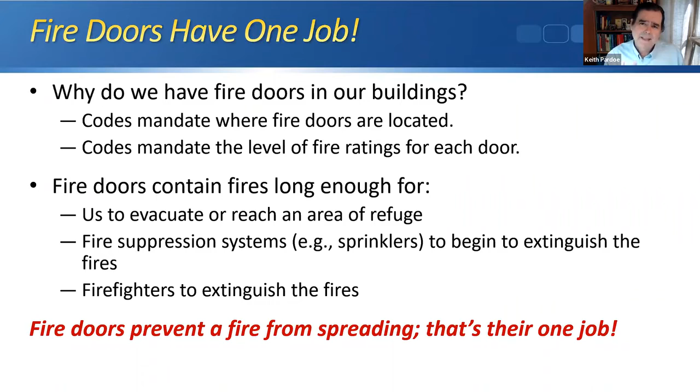The reason those doors are there is to prevent a fire from spreading. That's their one job. They do other things, obviously, right? Swinging doors do a lot of other things. But their one job is to prevent a fire from spreading. They give us time. They give us enough time to reach safety. They give us time for the fire suppression systems to do their work. They give us time. That's why they're not fireproof. They're not going to protect the building forever, but they'll do their job long enough.

Some of you might be familiar with the different levels of fire ratings of our swinging doors. This is a quick list of them.

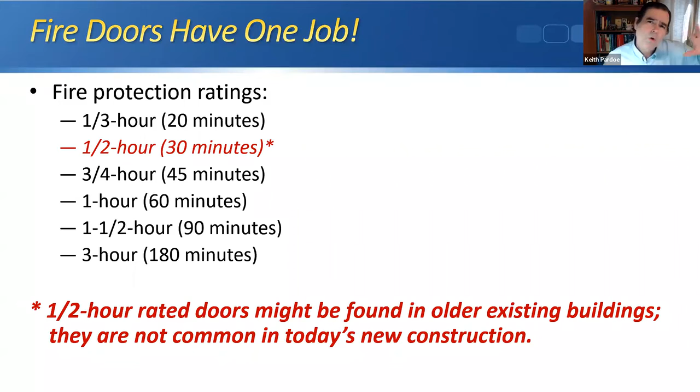The one in red, the half-hour door, was in our codes and standards for a short period of time when you look back at the longevity of our codes. Some older existing buildings, you might find them out there. Today we don't use the half-hour rated door so much, but it's a viable fire-rated door assembly because it was allowed at the time of construction. So we have to remember, it's not just about new construction going forward, it's about what's already out there in the world, what's already in place, what's already doing their one job, hopefully.

Because fire doors have that one job, they need to be maintained in a constant state of readiness. It's a little different perspective than you might have heard before, right? A constant state of readiness. We don't know when there's going to be a fire or where. The codes demand in these locations there will be fire doors. The expectation is that those fire doors are properly installed, provide the correct level of fire protection rating necessary for that area of the building, and are properly maintained. They are able to do their one job.

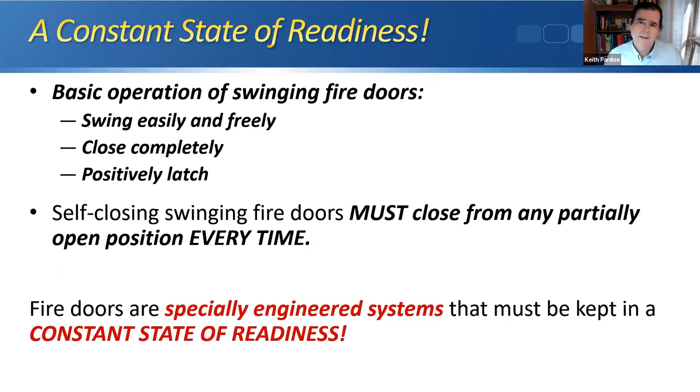The basic operation of fire doors, of swinging fire doors, you can see on the screen. They have to swing easily and freely. They have to close completely and they have to latch. A swinging fire door, whether it is a self-closing door or an automatic closing door, doesn't matter which. In the end, they must close every time from any partially open position. That's how they do their one job. That door must be closed at the time of fire, closed and latched. They must be enabled to do their one job.

Now, this project is the second phase of the research project, which the first phase started back, I think, around 2015 or 2016. In this particular phase, we actually were able to conduct experimental full-scale fire door tests. Mike's going to explain in great detail the types of tests that we did. But we were trying to find out, what if we had these gaps?

How does that affect the performance of these doors? So on purpose, we chose doors that are representative of the older doors, the doors that have been out there for many years. Mike's going to talk a little bit about the difference between neutral and positive pressure in a little bit. Positive pressure fire door testing - today that's something we are very familiar with, but it's only been about 20 years, a little over 20 years, that we've had positive pressure fire door testing.

Prior to that, all of the fire doors were tested under what's called neutral pressure testing conditions. So that's why we chose the older style doors, the older type of doors, to conduct this testing, to find out with these older doors, if they have these larger gaps, how is that likely to affect their performance? So keep that in mind. Older doors - when I talk about older doors, I mean doors 25 years and older. Think of it that way.

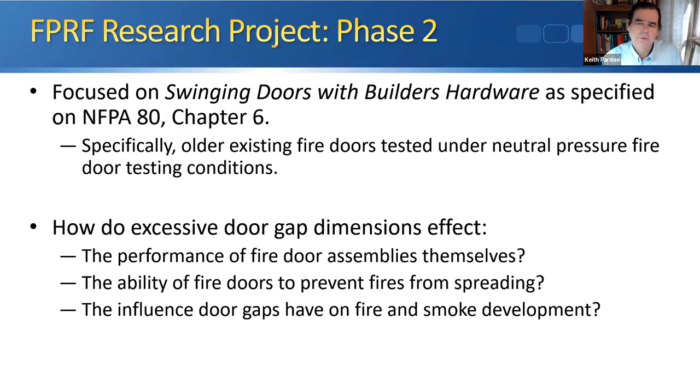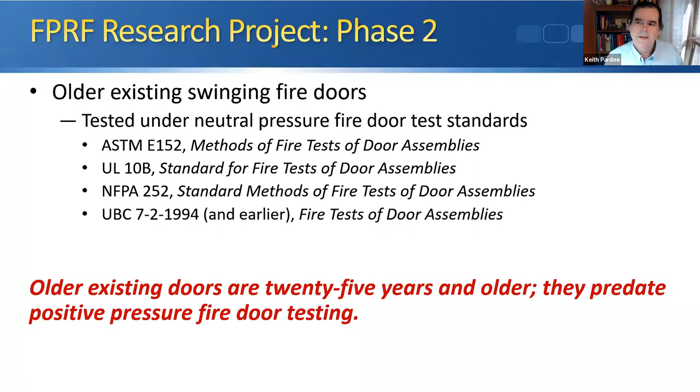When we talk about older model building codes, today we're all conditioned and familiar with the International Building Code. It's fairly uniform across the country these days. However, not so long ago we had other model building codes that were more regional. Many people forget these original building codes even existed.

But in the case of fire doors, especially when performing safety inspections of swinging fire doors, you have to be aware of the model building codes in effect as of the date of installation. Because there are no expiration dates on these fire doors. A door from 1947 that was installed properly, maintained properly, and in otherwise serviceable condition should be allowed to remain in service indefinitely. But the rules in 1947 are much different than the rules in 2022, so we have to be mindful of that. This project is trying to answer how these older doors might perform.

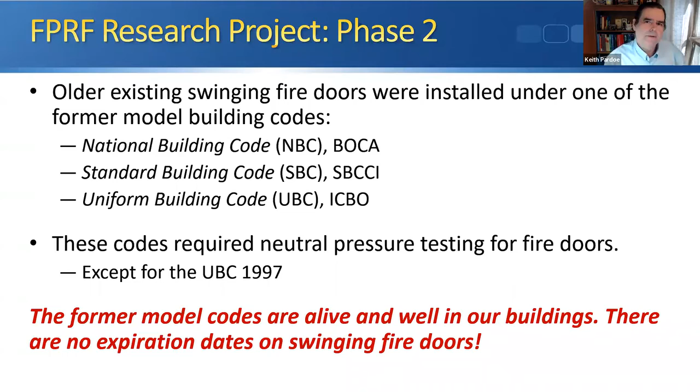Another disparity we're trying to figure out - those familiar with NFPA 80 might already be aware - is that NFPA 80 in some cases allows for greater door gap clearance dimensions than the fire door test standards. Remember, the fire door test standards are laboratory conditions. Some might call them a worst case scenario condition, depending on your perspective of worst case.

NFPA 80, for instance, allows a maximum of 3/4 inch gap underneath a Chapter 6 swinging fire door. The fire door test standards, today's and yesterday's, for single doors limited that gap under the door to 3/8 of an inch. It still is today. For pairs of doors, it was 1/4 of an inch, and it still is today. That's how our new doors, even today, are tested under positive pressure as far as gap clearances are concerned.

NFPA 80 allows larger clearances, and that was part of the curiosity of this project - what difference does it make to the performance of the doors? Because of inspections going on since about 2007, there's been interest in raising the gap at the bottom of the door from 3/4 of an inch to say an inch, possibly 1.25 inches. What would those changes do to door performance? That's what we're going to find out when we get into the details of these tests. We tested some doors with a 1-inch clearance, and Mike will tell us all about it.

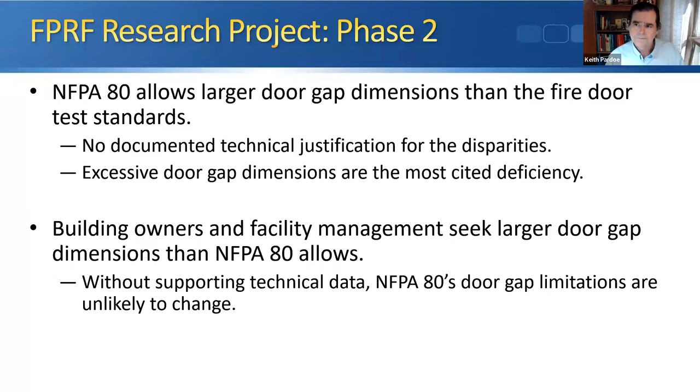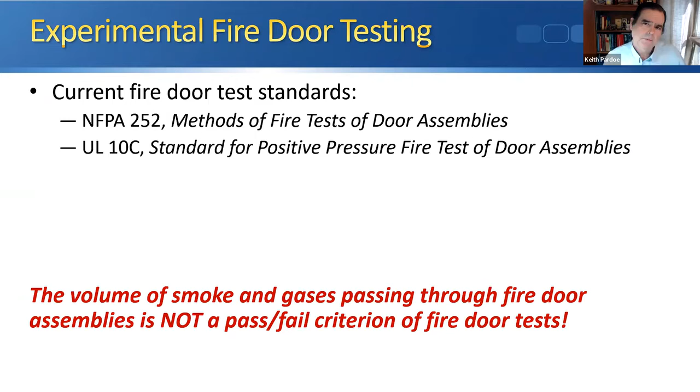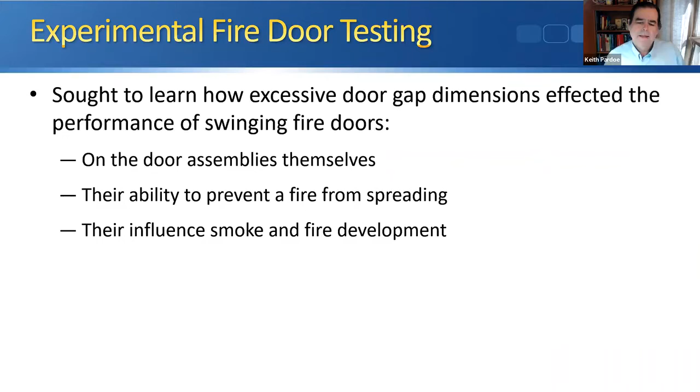So that's another aspect we're trying to figure out with this phase of the project - how these larger door gaps might affect the performance of the doors and their ability to do their one job. Now, keep this in mind: we conducted I think 17 tests - Mike will confirm how many different assemblies we tested. But in all the tests conducted, it is an extremely small sampling and not representative of the greater body of swinging fire door constructions out there. This is a very, very small sampling.

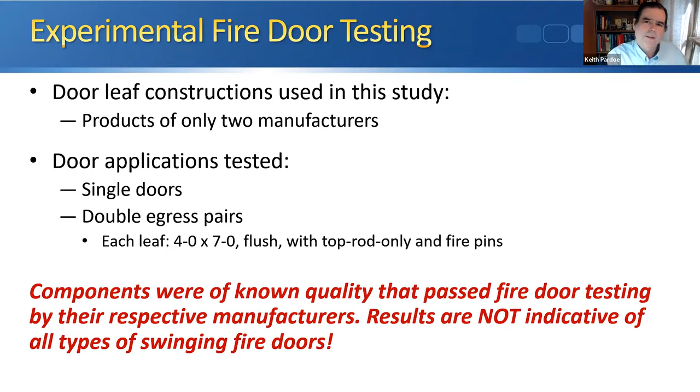What's critical to know is that the note at the bottom of the slide tells us we used products that had already passed fire door testing - products of known quality that already passed testing by their respective manufacturers. We installed them in non-typical, non-standard applications by changing the door gaps at the bottom and along the vertical and top edges. We introduced these different conditions - the idea is, let's take a product we know and see what happens when we change these details.

When you think about the world of hollow metal doors or steel doors, commercial steel doors, swinging doors, these are all the different types of constructions that we have, the different types of cores. They can be made out of 20, 18, 16, and 14 gauge steel face sheets. So there are a lot of different combinations of core and edge construction and face construction, and each manufacturer builds their products differently.

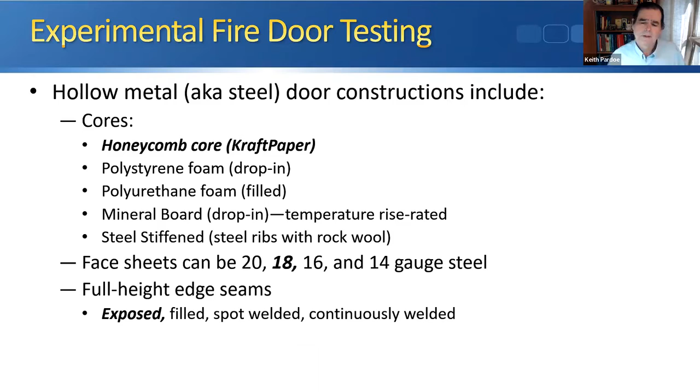The end result appears to be the same, but internally they're different. When we talk about wood fire rated doors, there's actually very little wood in wood fire doors these days. These are some of the cores. But even when we talk about mineral board core, which is that gypsum-like thick core, there are different categories, different formulas of that gypsum product, of that mineral board core product. Some have more capabilities than others.

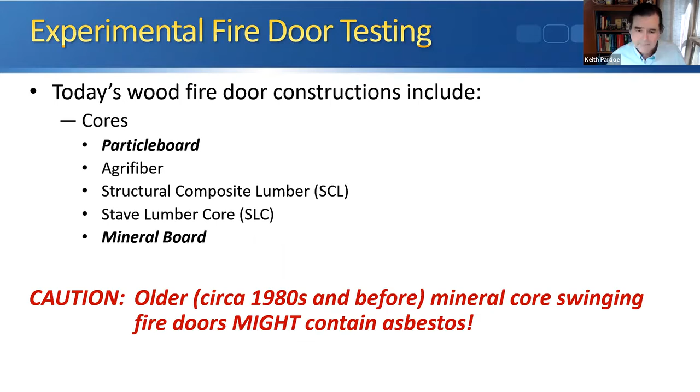So again, you can see this, it would be very difficult to conduct experimental fire door testing of all possible combinations of doors. We just can't do it. So keep that in mind. So I'm just about done. One word of caution, warning, viewer discretion is advised. Again, keep everything in context. Mike's going to share the information that we found, and you can see where it takes us from there. All right, I'm done. I'm going to turn this over to Mike.

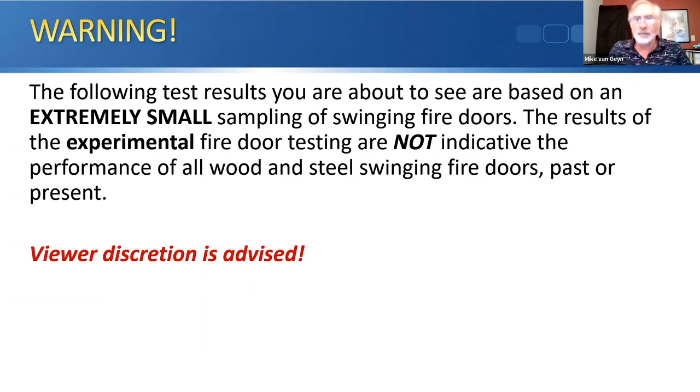Thank you, Keith. Before I get into the test results, I just want to add a little bit to what Keith was saying.

You'll see references to positive pressure testing versus neutral pressure testing. This happened in the transition between the 1997 Uniform Building Code and the International Building Code around 2000. So when we do the actual fire test, the standard requires us to achieve the positive pressure within 5 minutes. The way we do this is we slowly close the furnace damper to restrict the exhaust. And this bottles up the hot gases in the furnace. And as we gradually lower the damper, the transition line between positive pressure and neutral pressure gradually lowers from the top of the door down to the latch level. So at 5 minutes into the test, we have our positive pressure achieved at the latch level.

So what this means is that at any elevation below the latch level, we still retain a negative pressure, so any air will go into the furnace. And at any point above the latch level, hot gases will be trying to get out, so they'll tend to come out between the edges of the door. As you go gradually higher above the latch level, that pressure increases. And as you go down below the latch level, the neutral pressure or negative pressure increases. So you have this balance of cold air going in below latch level and hot gases trying to get out above the latch level.

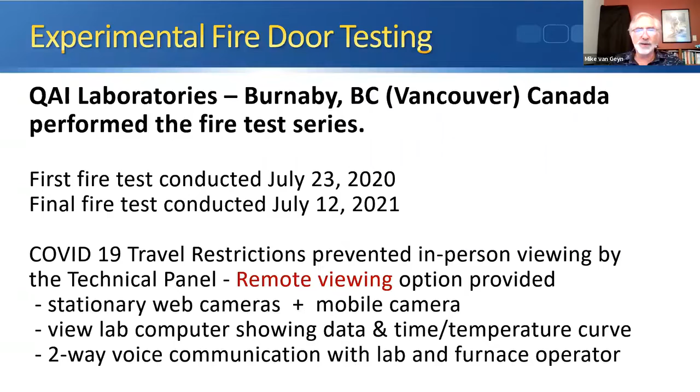We were able to communicate directly with the lab using two-way voice communication via Google Meets. This was an experiment in its own right, but it worked fairly well, and we continued to do that through the entire test series.

The first series was the proposed initial program of 9 fire tests, but the results showed that more information was needed, so the test series was expanded by adding 4 more tests.

In all of these tests, the clearances of NFPA 252 were not used. The sill clearances were set at 3/4 inch, the maximum currently allowed by NFPA 80, and also at an increased gap of 1 inch, so we could evaluate the difference between the 3/4 inch and 1 inch gap on identical test assemblies.

In the second series, the thought was, what would happen if we did the same test but with the 1/4 inch gap required by NFPA 252? So that's a comparison.

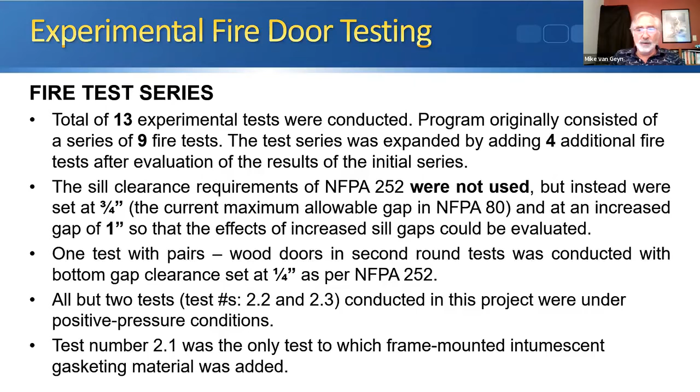All of the tests except 2 in the second series were conducted under positive pressure test conditions. In the second series, we added a frame mounted with gasket material, typical in a positive pressure assembly, to see what difference that made.

Under the fire test conditions, the acceptance criteria are very specifically specified. I want to go through those because that's what determines whether the test assembly meets or does not meet the acceptance criteria.

We did a hose stream test on all of the assemblies. The 20-minute doors do not require a hose stream test in the USA, but we conducted one anyway.

Per NFPA 252, the first thing is the fire door assembly shall remain in the test wall opening throughout the fire and hose stream test. There are specific allowances of flaming.

In the first 30 minutes of the test, it's very restrictive. A flame has to be less than 6 inches long, and the duration cannot be more than 10 seconds at a time. After 30 minutes,

it's a little bit relaxed. So you're allowed intermittent flaming, again with a 6-inch flame length limitation and a 5-minute time limitation, no more than 5 minutes for each flaming event.

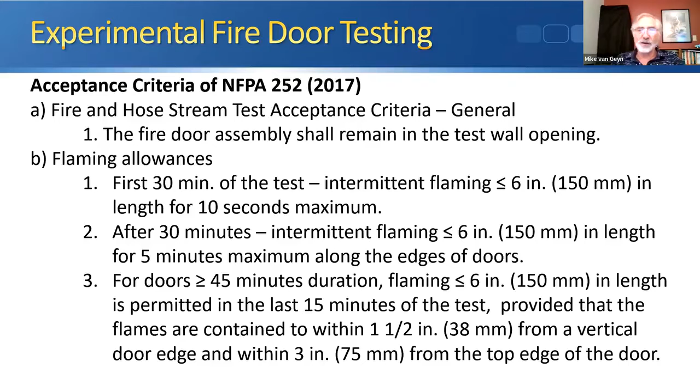So when you're running the fire test, you have to estimate or measure the length of the flames and time the duration to determine whether you meet the acceptance criteria for flaming.

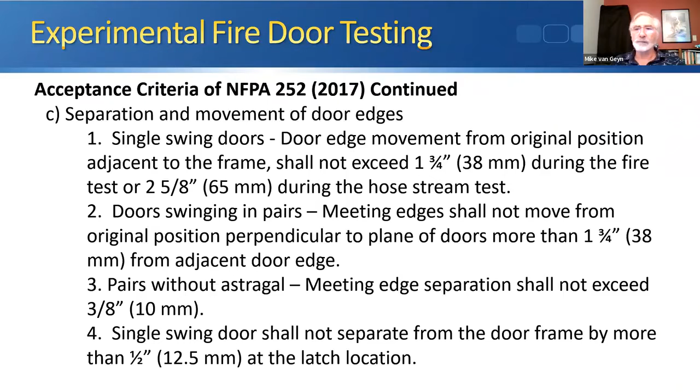Okay, for what we tested, the door frames in all cases were 16 gauge pressed steel, fully welded frames installed in concrete masonry unit block walls.

The pairs of doors were installed in a double egress configuration frame. So all the pairs were double egress. There were no standard pairs.

The steel doors were 18 gauge skins, 90-minute fire rated, labeled flush lock seam type hollow metal doors with a paper honeycomb core. Each leaf 4-0 by 7-0.

For wood doors, they were wood edge, 20-minute rated particle board core, solid core flush doors. Each leaf was 4-0 by 7-0. These are what we called category B doors, essentially traditional doors tested under neutral pressure conditions with no intumescent in the door edges.

There is one exception though. In order to meet the listing, the pairs of wood doors did have an intumescent in the meeting edges of the pairs.

So under positive pressure test conditions where you have hot gases trying to escape through the door gap in the upper part, with the code change in 2000, one of the solutions to the effect of that erosion from hot gases was the installation of intumescent either in a door edge as a concealed intumescent or added to the frame.

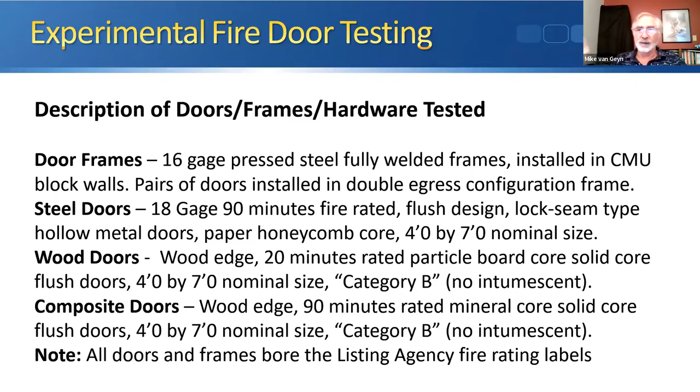For the hardware, the hinges were standard on all the doors, 5 inches by 4.5 by 0.190 thickness, full mortise, 5-knuckle ball bearing steel hinges. So standard commercial grade conforming to NFPA 80 hinges. The latch was a commercial grade mortise lock passage type using lever type handles. Very standard hardware.

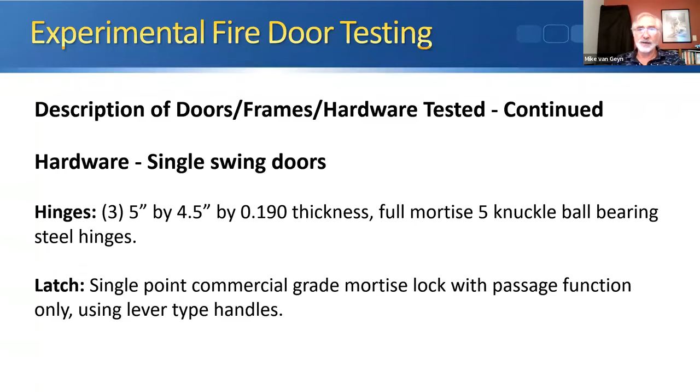For the pairs, same hinges. For the latches though, they used a vertical rod type, top rod only, so less bottom rod, fire exit hardware with lever trim on the pull side. So because all of the pairs were double egress design, the vertical rod hardware would be, the push bar would be on one side for one door and on the other side for the other door.

Because of the top rod only configuration, the listing required an auxiliary fire latch or thermal pin to be installed near the bottom of the meeting edges. This would latch the pairs together because there's no latching to the floor. These auxiliary fire latches or fire pins were installed at 6 inches from the bottom of the door for all the double egress pairs tested.

There were no astragal used on the pairs, so they're just plain edged doors.

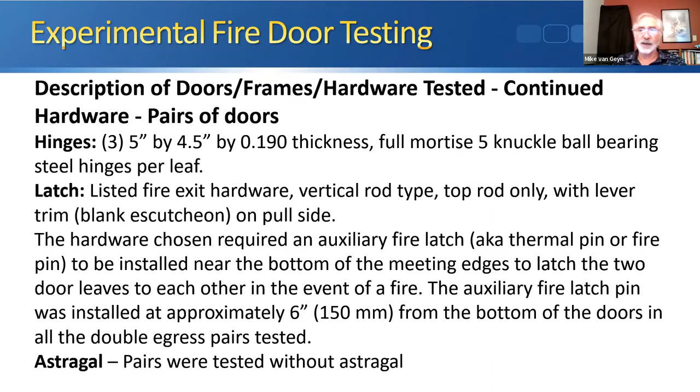The single swing doors were tested side by side, with the only difference being the sill gap of 3/4 inch and 1 inch, so we could compare the results for the single swing doors at the same time.

So this is a photo of the actual test installation for the wood door test. The door on the right has a slightly larger sill gap, 1 inch in this particular case. As with all door testing, these doors are oriented to open towards the fire.

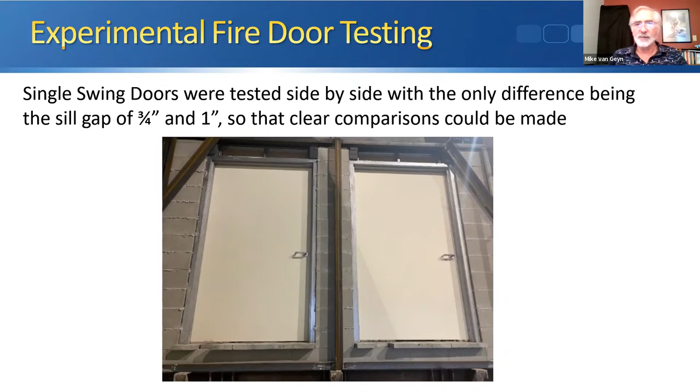In the case of the double egress pairs, it doesn't matter because you always have one door opening into the fire and one door opening out.

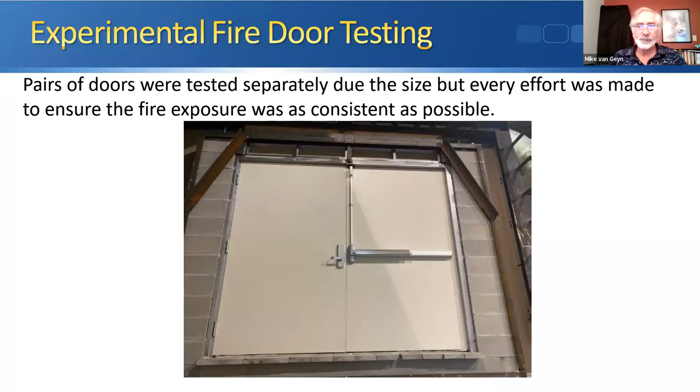So this is a description of the test series for the first 9 tests. Essentially we would have one test of 2 single swing doors of a given type, then a second test of a pair with 3/4 inch sill gap, and a third test of a pair with 1 inch gap, for 20-minute wood doors, 90-minute composite doors, and 90-minute rated steel doors. So 3 types of doors, 3 test configurations, 9 tests.

Everything's the same except for the 3/4 inch versus 1 inch sill gap. So we didn't do the doors in order. We've listed them in order, but the dates are different for a variety of different reasons.

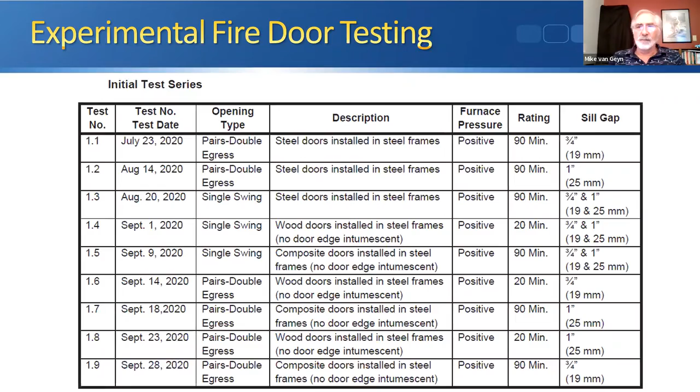For the second series, the tests were determined by the test panel, the technical panel, as a result of the results of the first series. So this is exploring a few additional details.

Test 2.1 added the retrofit door edge intumescent to the frame, which is typical for positive pressure assemblies. This is a duplicate test, but with retrofit intumescent added for the two single swing doors, one with a 3/4 inch sill gap and one with the 1 inch sill gap.

The second test was also single swing doors, composite doors, the 90-minute mineral core doors, no edge intumescent installed, but tested under the old style neutral test pressure, and that was tested with a 3/4 inch sill gap.

So this test was looking at what would happen if you did this in 1997 and just changed the sill gap from the required 1/4 inch to 3/4 inches.

The third one was a double egress pair, 1 inch sill gap, neutral pressure, 90-minute rated. So a duplicate of the previous one, but with the 1 inch sill gap.

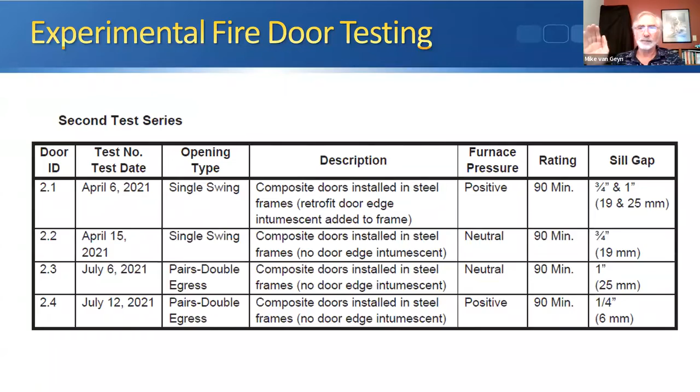So we'll get into the actual test results.

For all of the other tests conducted in the first series, there was some technical issue that resulted in the test not meeting the acceptance criteria fully.

So on the steel doors, they all passed the hose stream test. However, only the 3/4 inch sill double egress met the acceptance criteria fully. The single swing doors did not meet acceptance criteria fully, neither did the double egress with a 1 inch sill gap.

On the wood doors, the 20-minute rated wood doors, none of the tests met the acceptance criteria of either the fire test or the hose stream test.

And the same in the case of the mineral core composite doors, none of those tests fully met the acceptance criteria. Some were better than others, but when you go to the exact requirements of the test method for both flaming and separation, etc., they did not fully meet the acceptance criteria.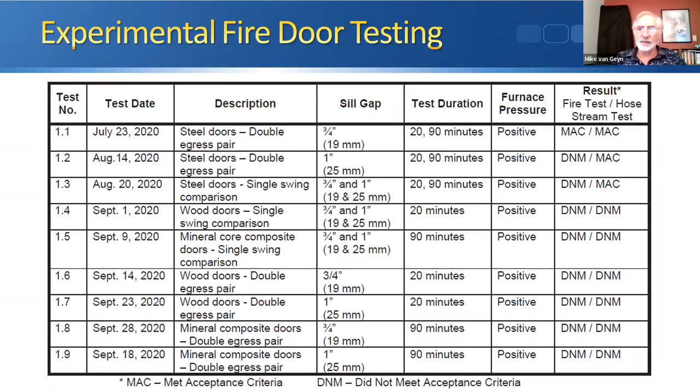For the second series, the performance was different in many cases. However, to our surprise in many ways, none of these tests fully met the acceptance criteria as well, of either the hose stream test or the fire test.

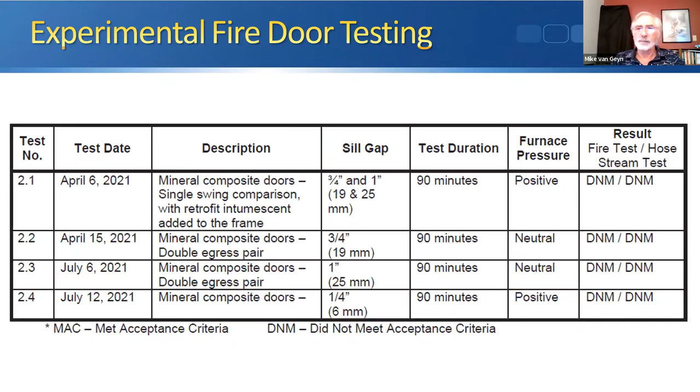So look at the steel door tests. The steel door tests, I would say, generally performed fairly well.

So the primary problem on the single swing doors was we did see some flaming in the early part of the test, in both the 3/4 inch and 1 inch sill gap tests, side-by-side comparisons. We had flaming in both cases, but this problem only lasted 10 minutes. After the 10 minutes where the flaming was out, there was no further issues with the doors.

The issue here is that flaming is allowed in the first 30 minutes, but the duration is very limited. We have a 30-second maximum duration, but we had flaming for 2 minutes in one case and for almost 5 minutes in the second. So although flaming is allowed, it is not permitted for the duration that occurred in those tests.

The 3/4 inch double egress pair assembly met the acceptance criteria, and there was no flaming that occurred.

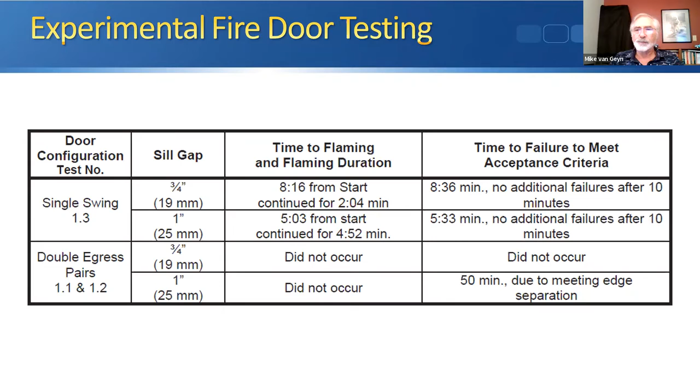Here's a photo of the steel door tests where you can see the flaming that occurred on the single swing door. In this case, the pressure is positive, so you can see smoke coming out between the door and the frame on the right side door. At any point below the latch, air would be going in. On the left side door, you can see that these gases, which you see coming out on the right, have actually ignited, causing the flaming you see.

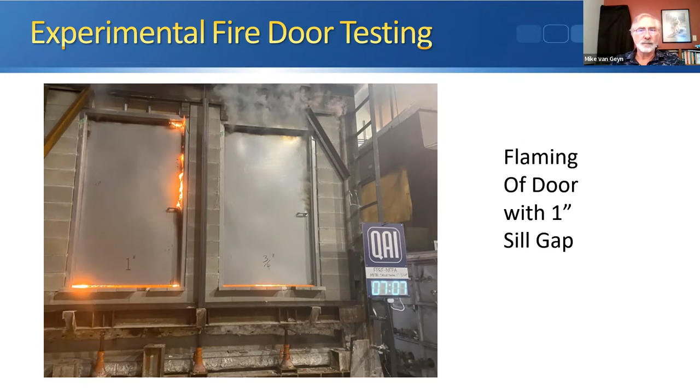For the steel door with the 1-inch sill gap, the maximum gap occurred right where the hardware is located. You can see that the doors are tight at the top and fairly tight at the bottom, and the gap is the largest at the center. So these doors are bowing inward towards the furnace, and that bowing is causing the gap in the middle. The gap is only allowed to be 3/8 of an inch when it started out at 3/16. So that gap opened up more than 3/16 from its original point. The gap is not huge, but it's beyond the 3/8 inch that's allowed by the test method.

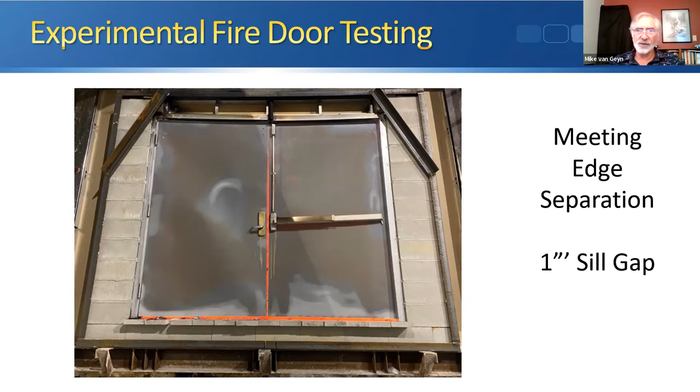For the wood door tests, in this case the primary issue was flaming. Wood doors' edges are quite vulnerable to the positive pressure test scenario, because the hot gases trying to escape from the furnace by coming out between the door edges and along the top tend to erode the wood edges, and this causes flaming, particularly in the positive pressure zone. The flaming occurred at different times, but once it started, it was continuous basically till the end of the test in most cases.

The other problem is that erosion of the door edges is a problem for the hose stream test, because the force of the hose stream will push the door up against the frame stop. If the edges are gone, then there's nothing to stop the door from being pushed through the opening, and we did see this happen.

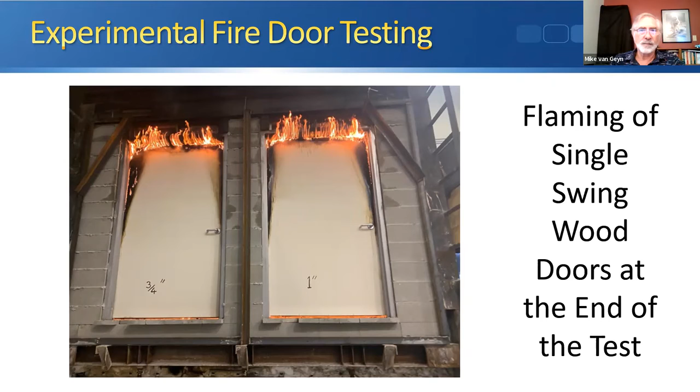For the pairs, a very similar type of event happened. In these doors, there is intumescent at the meeting edges, but only at the meeting edges. You can see that the meeting edges are quite tight, and we don't see any flaming along the meeting edges.

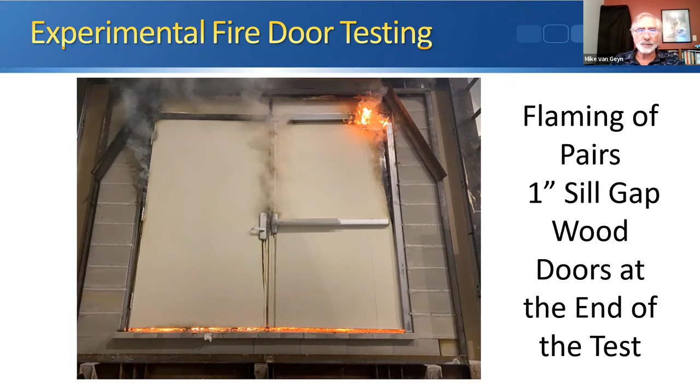For the composite 90-minute mineral core doors, flaming was a big problem as well. Once again, these doors still have some wood around the edges, and this wood would tend to erode when in the positive pressure zone. We did not see flaming on the 1-inch sill single swing, but we did on 3/4 inch. We don't really know why there's a difference. But we did also have burn-through openings on the mineral core doors. These burn-throughs tended to be, as we'll see in a photo, between the core and the stiles.

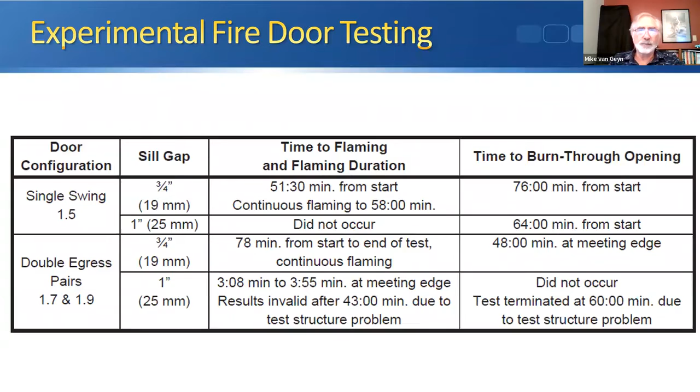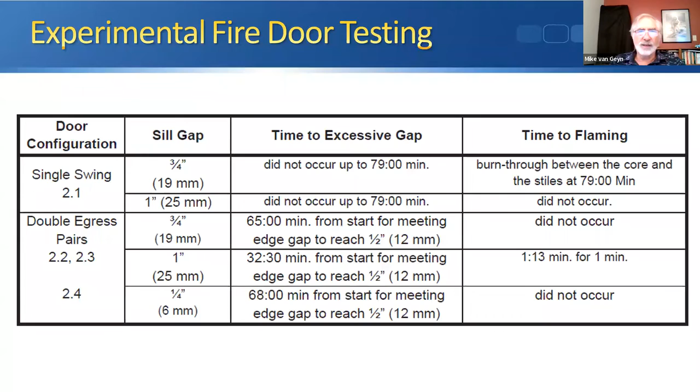In the case of the flaming, on the single swing doors, we did have burn through between the core and the stiles, not in all cases. We had problems with the meeting edge door gaps. This is the second series. We had problems with the meeting edge gaps on the double egress pairs, and this happened irrespective of the clearance underneath the doors; we still had erosion of the meeting edge gaps. The second series tests generally still performed a bit better than the first series, but we were surprised that we still had these issues in the results.

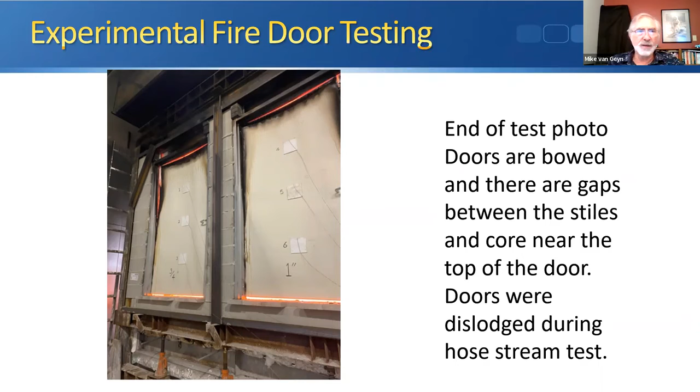The next slide. These are the mineral core doors at the end of the test. You can see there's a lot of curvature of the doors, a lot of what we call bowing, where the door is bowing towards the furnace. These doors, because of the edge erosion, were dislodged during the hose stream test.

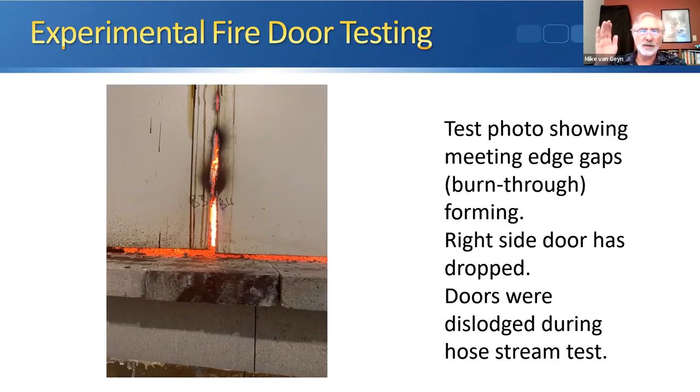So this is the same test where you can see the burn-through at the bottom that we were looking at as a close-up. You can also see that the door on the right has dropped, so the bottom edge of that door is not in line with the bottom edge of the door on the left side. The door has tipped, and the reason for this can be seen on the top right, where the hinge holding the door in has failed between what appears to be the stile material and the core. So if the door were intact structurally, it would not be able to drop like that.

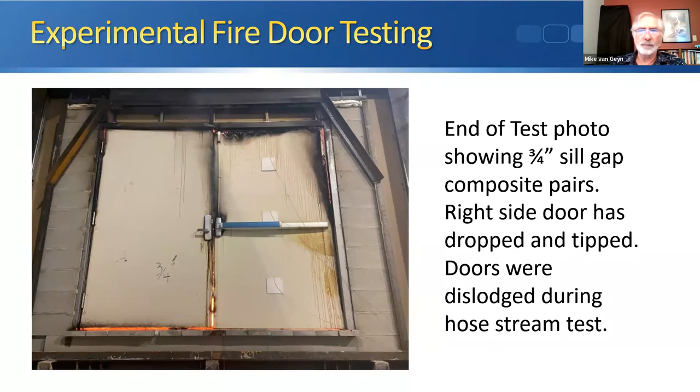So when we look at what the sill gap does in terms of cross-sectional area, keep in mind that the sill gap is in the negative pressure zone, so air will go in at any location below the latch, and the maximum negative pressure is at the bottom of the door. So the maximum amount of air would be going through underneath the doors.

So when we look at what NFPA 252 tells us to do during a normal fire test, versus what was happening with the increased sill gap, the cross-sectional area increases by 240 to 320%. And if we compare that for single swing doors, versus pairs of doors where the standard requires a 1/4 inch gap and we're now moving to a 3/4 or 1 inch gap, the cross-sectional area increases by 400 and 533%. So you've got 4 times, 5 times the cross-sectional area. What that does is let a lot more air enter the furnace.

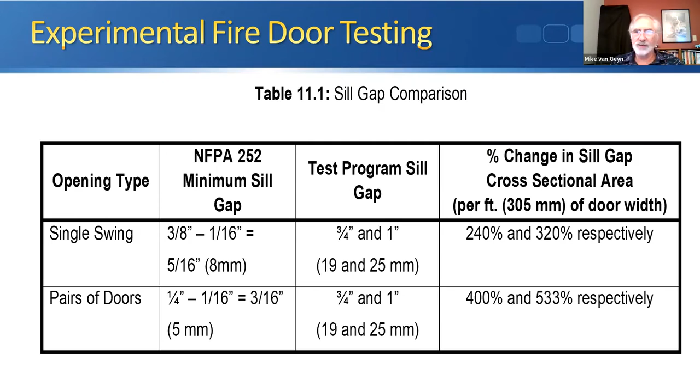One of the things that we did is we used a small vane anemometer and a kind of funnel to actually measure the airflow moving through under the door. Now, this is not an exact measurement, it's just for comparison purposes, so we could say, well, what is the actual airflow?

One of the things we did notice is that between the left side and right side door, when doing pairs, in one case you've got the hardware on the fire side, and in the other case you've got the panic bar and hardware on the non-fire side. On the fire side, these components are made out of aluminum, and they would tend to fall off the door and rest on the sill, and in some cases melt. So the debris from the hardware tended to slow down the airflow a little bit on one of the leaves versus the other.

But what we see in our measurements is that the airflow on the 1 inch sill gap was generally greater than the airflow we measured with the 3/4 inch sill gap. We would expect that because of the additional cross-sectional area, but it was nice to get that actual data showing how much that airflow really changed.

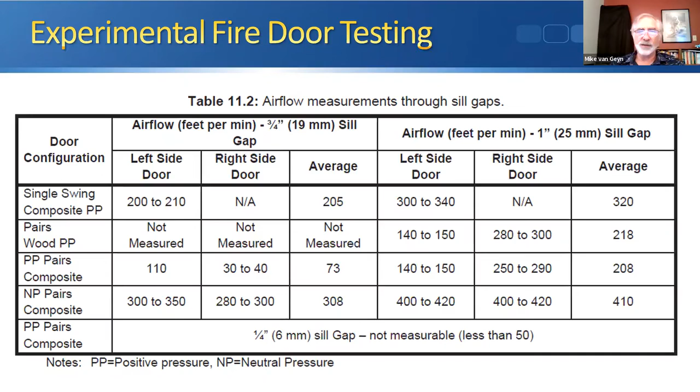In the case of the 1/4 inch sill gap, we could not get a measurement because we needed a flow of greater than 50 feet per minute to register on the meter, so it's not really accurate—we were well below that, so we couldn't get a reading. So that shows that in conventional testing, the airflow under the doors, particularly for pairs, is significantly restricted.

So as I mentioned, this airflow is a problem. It cools the furnace, which results in the operator having to add more fuel. This increases the flow rate. And when you increase the airflow and the fuel, you increase the convective heat transfer to the sample. An analogy is a convection oven, where you're cooking at the same temperature, but it cooks faster because the air is moving around.

The other thing that happens, particularly with wood doors, is that you're increasing the amount of available oxygen, which increases the rate of combustion of combustible materials. When you restrict the air going in, a lot of the oxygen is used by the burners, which tends to slow down the rate of burning of the door skins and cores in wood doors. So when you greatly increase the amount of oxygen, you'll see more intense fire. We did observe this in the testing.

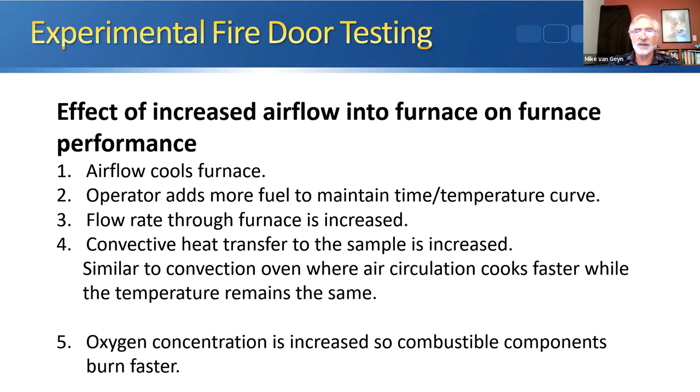So in the case of comparing positive pressure on doors originally tested under negative or neutral pressure, we have hot gases passing around the door edges that can erode the edges, increase gaps, and also cause flaming.

The typical solution to that, since 1997, has been to add an intumescent material. Intumescent materials expand when they see heat. They basically operate based on containing water, which turns to steam in one form or another, so that they expand and seal up the gaps. In cases where we don't have that intumescent material, there's nothing present that can compensate for the gap.

The other thing is that the intumescent materials currently in use were designed to function under the test conditions of NFPA 252, using the gaps specified in 252, which around the sides and top were less than what we used in this program. So the intumescent material will not be as effective in the tests where we used it, because it wasn't really designed to deal with increased initial gaps.

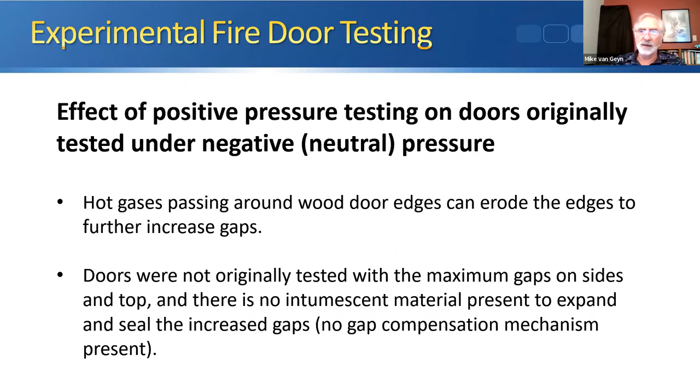So at the end of the day, this test program revealed that the edge and sill gap dimensions have a fairly significant effect on the fire and hose stream test performance, not only when tested to positive, but also when tested under neutral furnace pressure test conditions.

In the case of the steel doors, the effect was fairly minimal. We did see flaming that we wouldn't have expected, but generally those doors performed quite well, and they passed the hose stream test in all cases. We had a slight excessive gap between the meeting edges in one case, and flaming in another, but in terms of comparing, they were reasonably close.

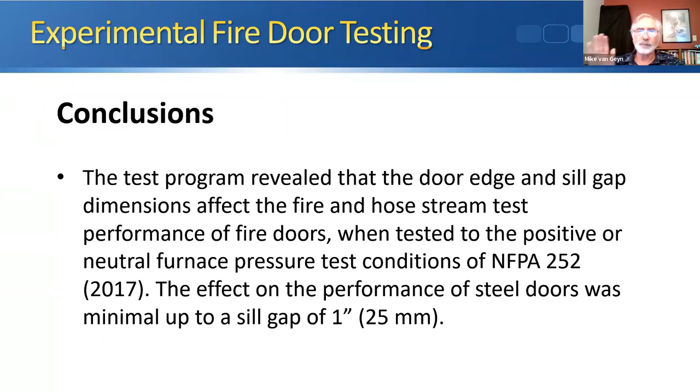In the case of the wood doors, the effect was significant as well, and we didn't meet the acceptance criteria of the fire and hose stream test. So we conclude that increasing the sill gap decreases the fire test performance of the 20-minute rated doors.

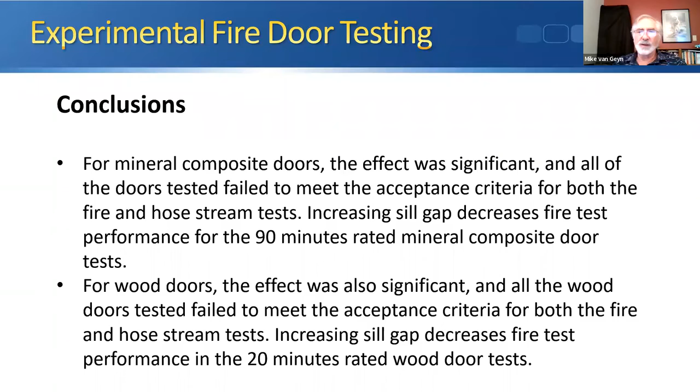There's a lot more work that needs to be done to fully evaluate the effect of not only the edge gaps but also the sill gaps. One issue is that we didn't really have a clear baseline test, even though these products had met the requirements when tested to NFPA 252. We didn't have a direct comparison of this exact configuration with the base clearance correct at NFPA 252 requirements, and then with the change in the sill gap. Without that baseline test of the exact configuration, it's harder to make direct conclusions on the effects.

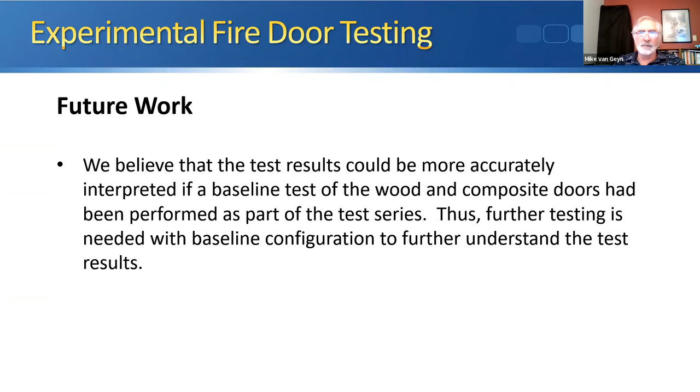The effect of the intumescent, particularly on wood doors under positive pressure conditions, is significant. So if we move this to doors made after the year 2000, where intumescent would be used, how would the change in gaps affect that? Same thing if you used retrofit intumescent systems—how would that work?

So there's still a lot of unanswered questions. Did we see failures just because of the difference between positive pressure and neutral pressure, or was it really due to the change in the sill gap? A final thing might be, if a 1 inch sill gap is a problem, then compared to the NFPA 252 requirement of 1/4 inch, at what point does the problem begin? Does it start at 1/2 inch or 3/4 inch and so on? So there's still a lot of work that needs to be done to fully understand exactly what happened and why it happened, and how it affects all of the doors in the marketplace rather than just the category B types that we used in this program.

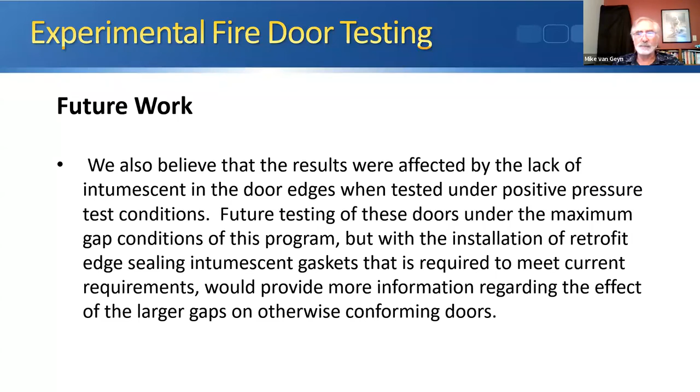Another topic would be what happens with regard to containing fire, smoke, and gases. We were only looking at fire test performance and the strict criteria of the fire test. That's only really part of the full performance of a fire door. A real fire is very different from the standard test conditions of a test furnace. In a real fire, you don't have an operator changing the fuel input. So one way of addressing this would be through computer modeling of real rooms and spaces and how the gap would affect the models. Modeling can be done over a variety of different clearances and conditions, so it can greatly expand the knowledge base that we're looking at.

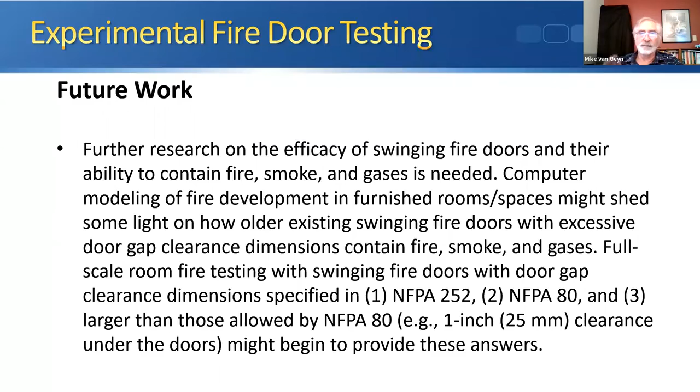So the full test report is available on the NFPA.org Foundation website.